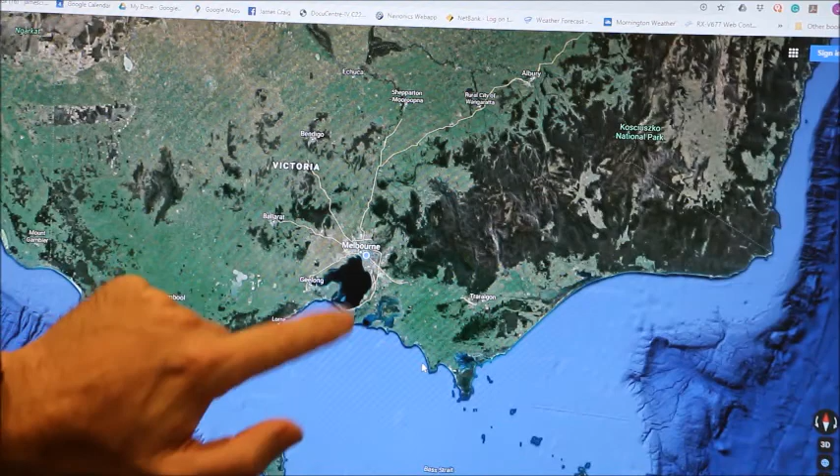What I want to do is I want to go back to the environment and something we as Victorians and we as Melburnians can do. And I want to take you through something that I think is important and it's very precious to me. And I'm just going to do this on my computer screen. It's a little bit old school, but here we go. Okay, clearly a map of Australia. And here we are down in Victoria, and particularly Melbourne. You can see this black dot here is the bay.

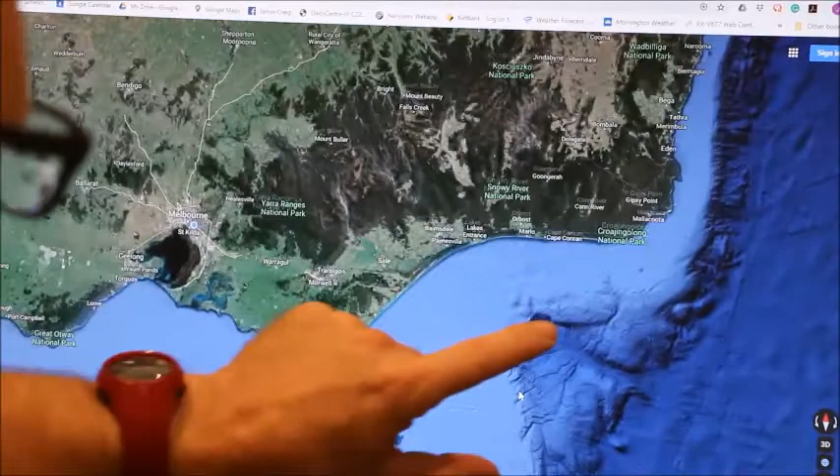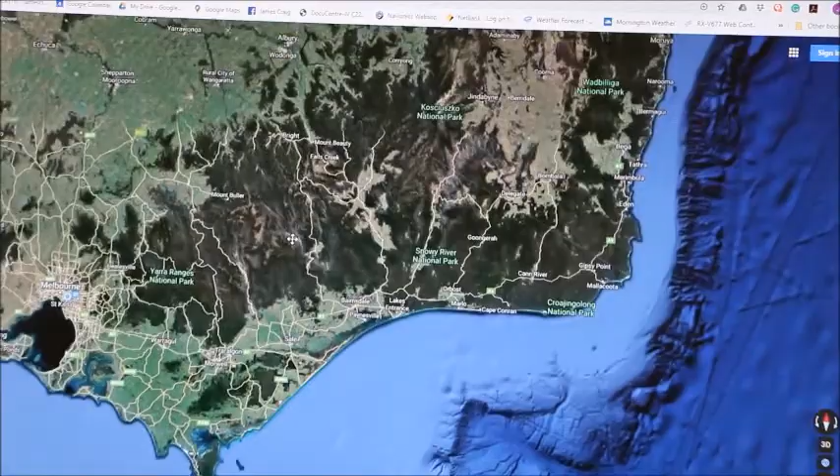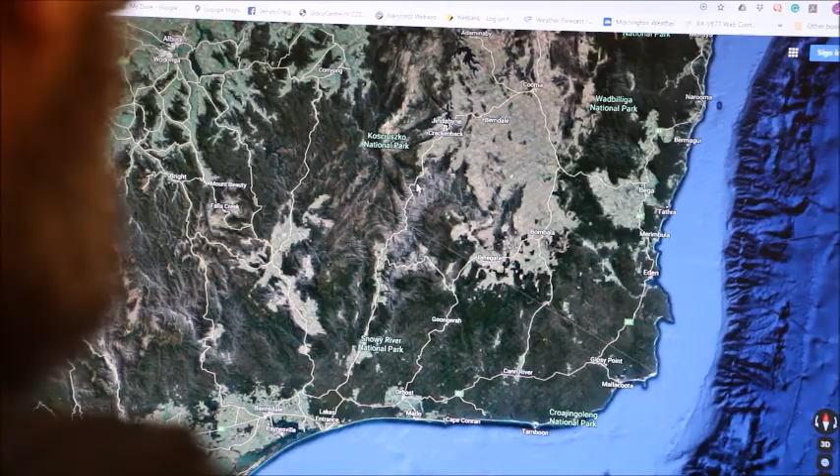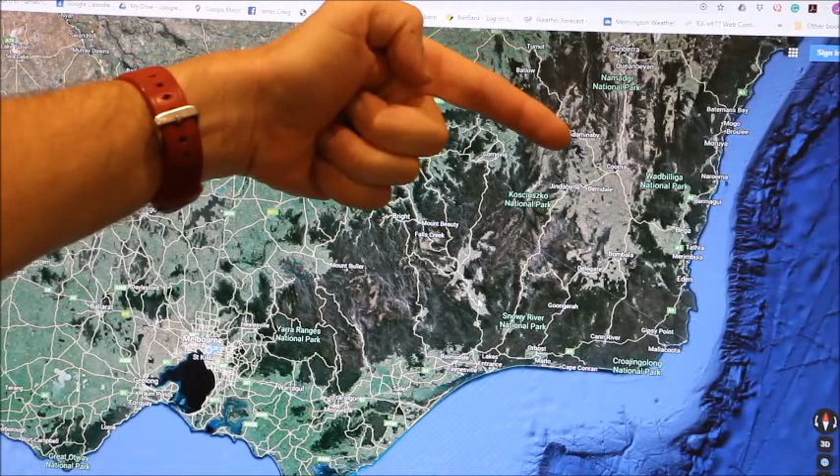We have up here a bit of a small power station coming off Eildon, and the governments are now looking at the Snowy Hydro scheme. And in proportion to Melbourne, here's Jindabyne and Eucumbene. This is the Eucumbene Dam up here in New South Wales. Canberra's somewhere in the middle here. There's Canberra up here. And the Snowy Hydro scheme is a very, very long way away from Melbourne. To get that electricity here, that's a big job. That's hard work.

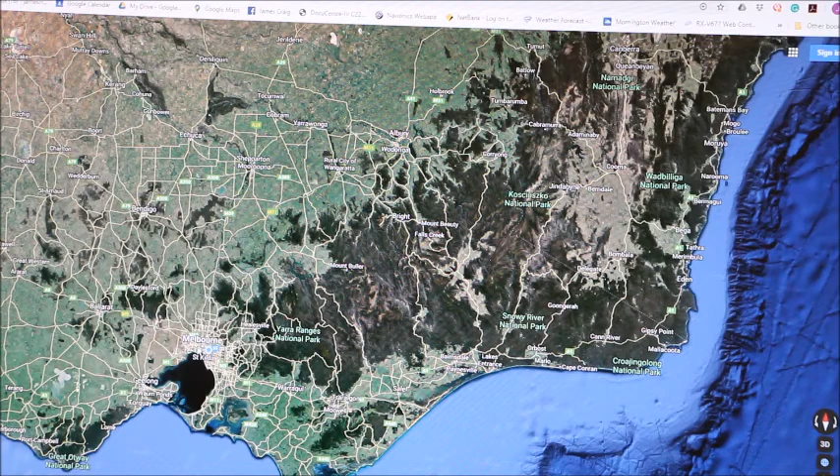We're burning our coal, which is quite conveniently nowhere where we get affected because of all the winds. The winds blow the smoke the other way, and as Melburnians, that's good for us. We can charge our electric cars up at the power point without having to worry about seeing any smog and pollution that you get from burning coal all the time. And these things run 24 hours a day, okay? We don't have any mechanism of stored power.

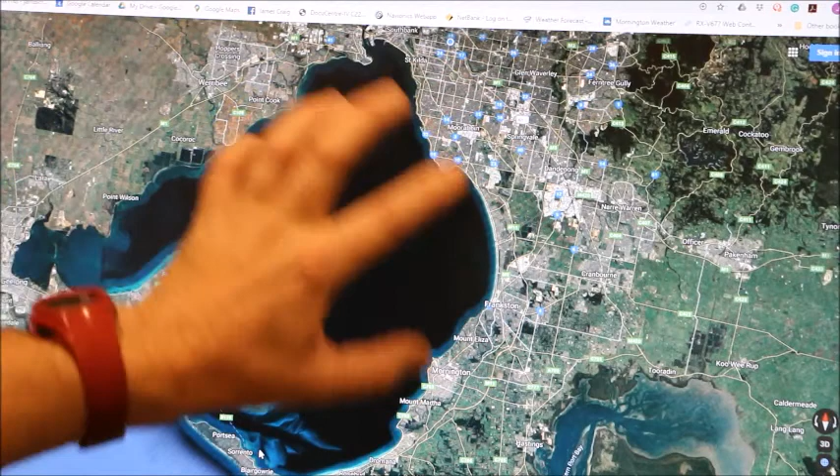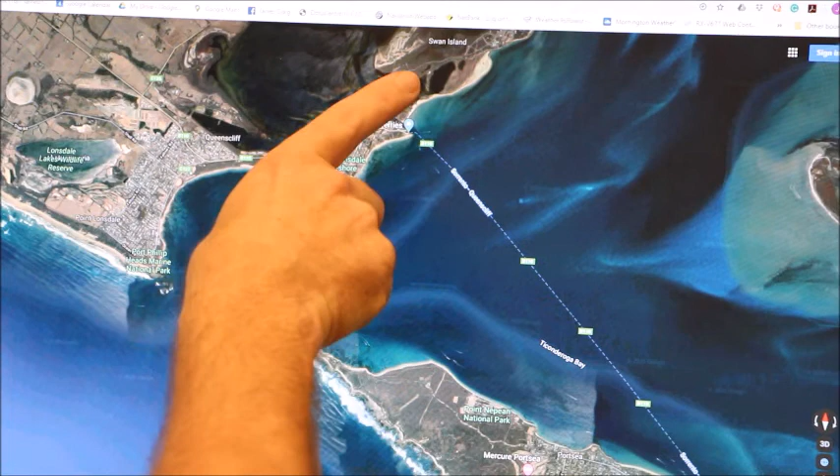Except this bay contains about 25 cubic kilometers of water. And it empties out at the heads here. Those of us who live around the bay are familiar with the heads. We've got the Mornington Peninsula on this side. Here's Portsea and Point Nepean. We have Queenscliff over here and Point Lonsdale on this side here. And you can almost see the flow of water that comes out through the heads here.

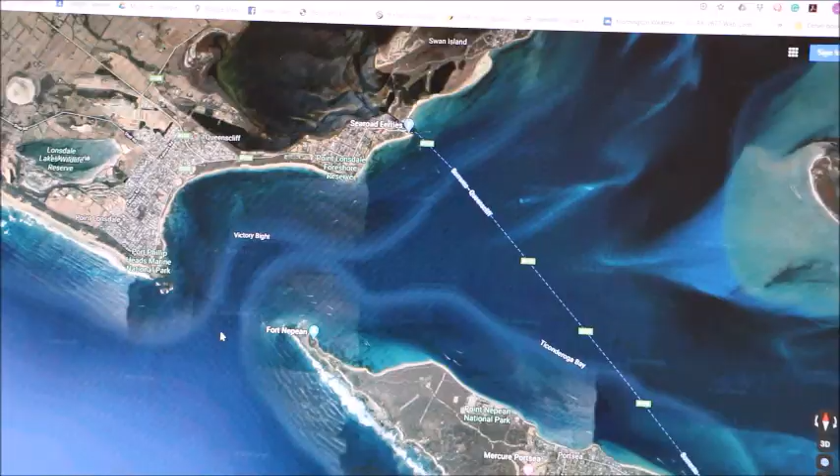And we have tides. We have tides every 6 hours. So the tide will come in and go out, come in and go out. It does it 4 times a day. And so we have this huge amount of water coming through the heads 4 times a day. And we have not captured, and I don't understand why the government and the energy minister is not capturing this amount of energy. It's free energy. It's an enormous amount of energy. And we've got to do it.

We've got to move away from coal. Absolute number one, we've got to stop burning coal. We've got to be at the front foot of leading the world with clean energy. Now, putting wind in, that's great. Putting solar in, that's great. But when it's not sunny here in Melbourne, not sunny here in Victoria, that's a problem because we're not getting any energy. When the wind is not blowing, we're not getting any energy. But 4 times a day, this tide is coming in and out.

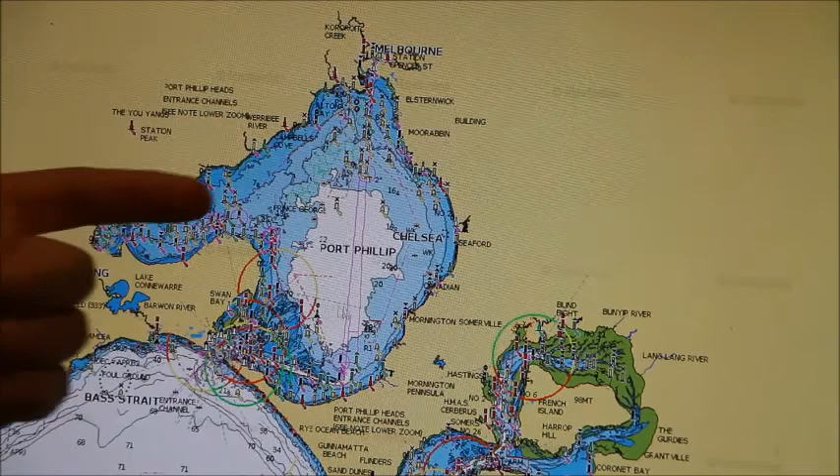Okay, and so I want to show you a model of something that I've been working on, a design that I've been working on. So here we are, here's Port Phillip Bay. It's about 20 meters in average depth in the middle here.

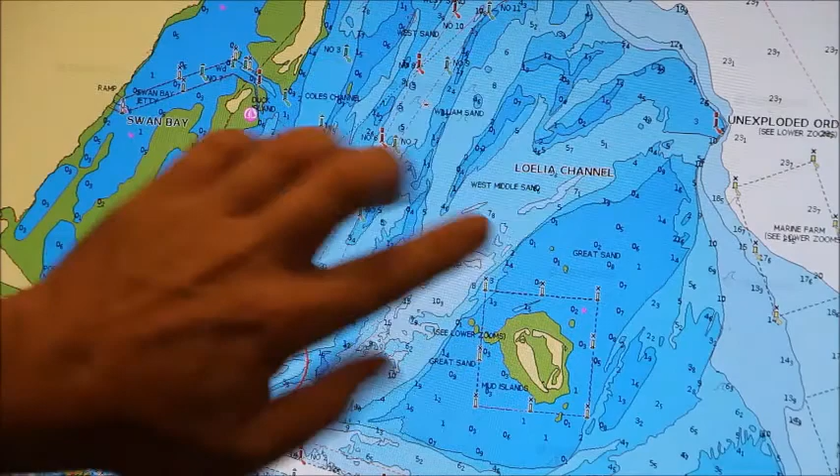And as we come down here, we have some really, really shallow areas where it's only about a half a metre, it's only a couple of metres through here. And then you can see this big white channel along here, that is where the ships come out of the bay. At the end of that shipping channel is a big deep trench running through here.

And on the Point Lonsdale side, it goes from about 60 metres of depth, and there's a sheer cliff that runs around this side of it like so. And it goes from about 60 metres of depth up to about 6 metres in depth in a very short space. So very big cliff face.

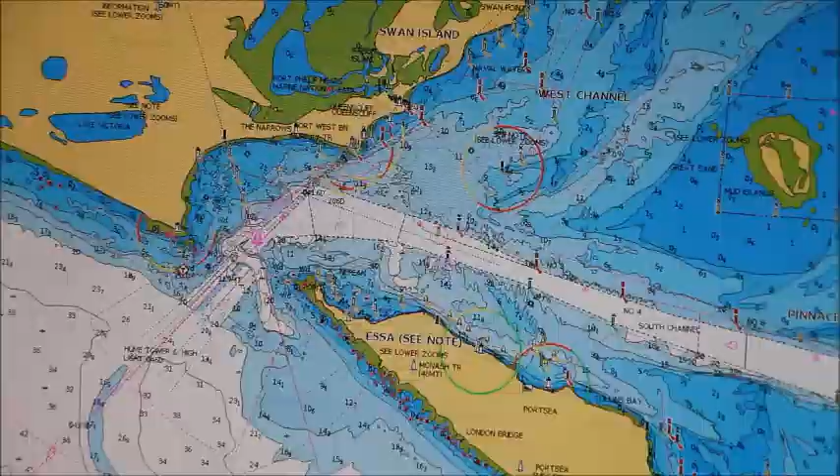Now this used to be a river. Once upon a time, before the bay was filled with water, this was about 5,000 years ago, this was all land. And this is the bottom of a river. And it came out and then exited the heads like so, and eventually joined up with the ocean. But 5,000 years ago, this was all land and we could actually walk to Tasmania. And as a result of it doing this, we're left with this big trench.

And those of us who know this area, it's a very dangerous piece of water because of the currents that come in and out, and of course our weather from Melbourne is predominantly southwesterlies. But I want to show you what I'm working on in terms of just occupying this tiny little bit of stretch here. It's about 1 kilometre long.

You can see here the shipping channels. This is where the ships go. This is the entrance. And I just want to show you what it is that I'm proposing in this space here, because I think this is really important. There's a couple of black lines through here, they're ships coming through the shipping channel, and you can also see another line in here which has a couple of markers on the end. That is 1 kilometre. Okay, so I'm just talking about 1 kilometre's worth of space.

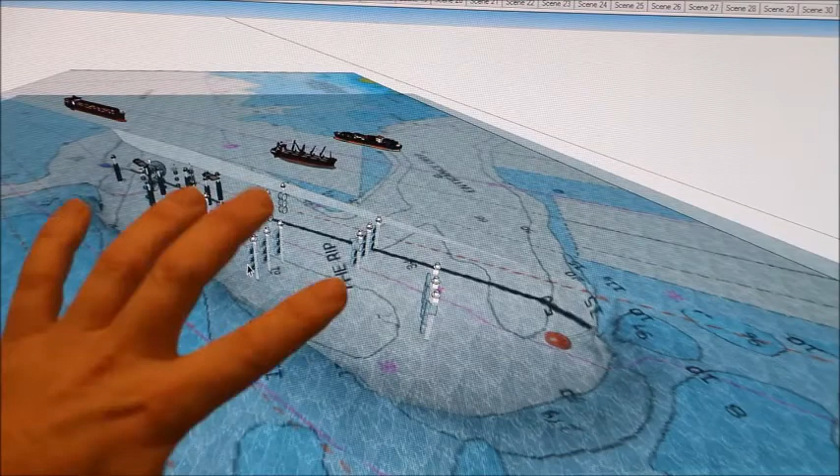As we fly in like this, you'll see what I'm talking about. The ships are sitting over here in their shipping lane, and the energy farm, the tidal farm, I want to put into this deep trench here. And the reason why I want to put it into the deep trench is because that's where you get the hardest and fastest flowing water.

If I take you back for a second to looking at how flow rates work in streams, you always get the maximum flow away from the sides and away from the bottom. There's too much friction along the bottom and along the sides. And so you'll always get the fastest flow in the middle of the deepest part, and when it goes around corners, the water will try and push out, because it's just the sheer weight of it, to the outer edge, like so. And this is well known. It's understanding flows through river and tidal stream effects. This is very well known. It's not new.

So here is my kilometre. We have inside of that kilometre this deep trench, tidal farm towers holding various turbines, just to give you an example of what it is that I'm trying to convey. Here is a working barge. You can get a bit of a sense of scale, and that's the barge that we're going to be using to do the maintenance on these structures.

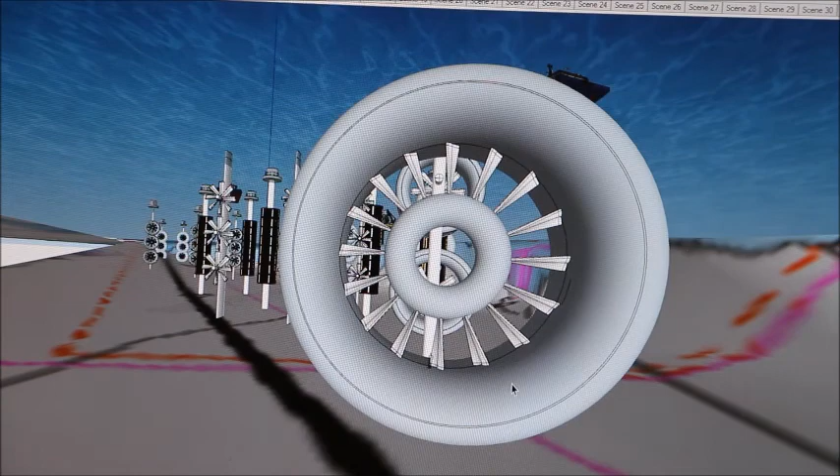So this represents a colossal ring generator. It is a massive piece. Now I'm not sure whether you can actually see it, but down the bottom here is a person standing just here.

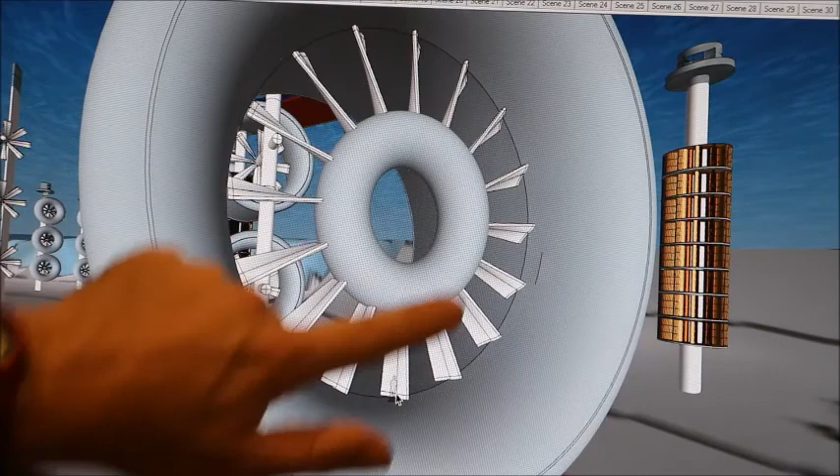That's how big this generator is in order to capture the flow. You can see the turbines around there. It has this donut on the inner ring, which I'll explain in a minute, and this massive cowling on the outside here. And the way it looks, if we look at it in half, and I just zoom in on where this guy is at the moment, we have what really just looks like an aeroplane wing.

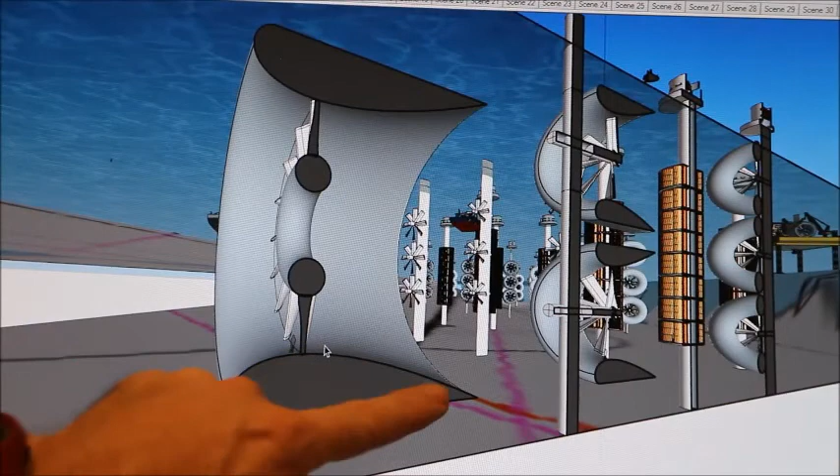And what we're trying to do is speed up water over this curve. So where the blade or the turbine is, we want to get the fastest speed through here. Now we don't necessarily need this laminar flow like a wing does, where we're trying to create lift. What we're trying to create is just speed. So we don't need all of this structure, but you get an idea of just how difficult this would be.

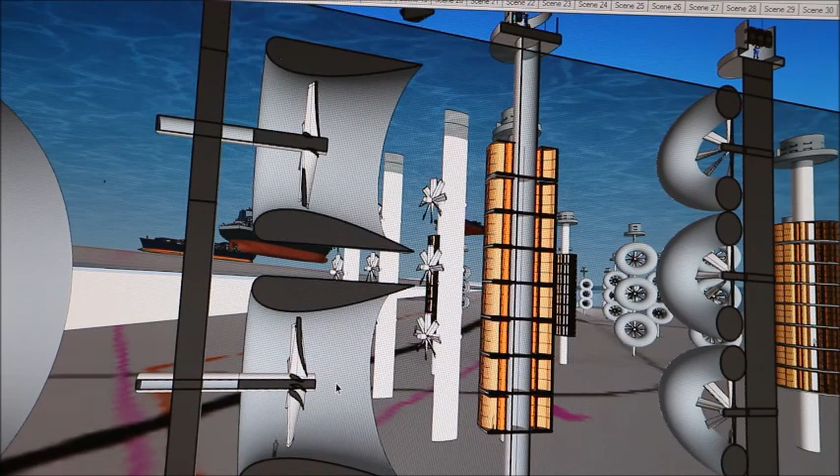This is 40 meters in height, 39 meters in height, this thing. It is enormous, and it's round and it's complex. So what I did is I split that into two similar sized turbines. The combined surface area is about 230 square meters. Same principle, same wing shape, same view of trying to accelerate water through. But these need to turn with all of the different kinds of currents and eddies that happen with water flow.

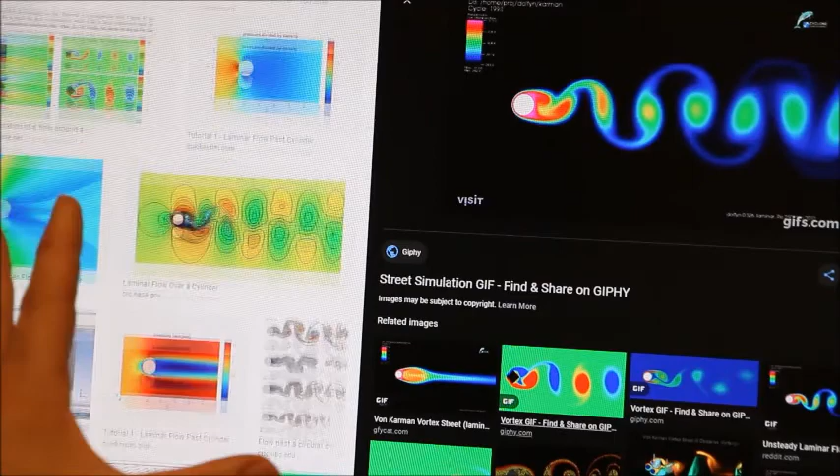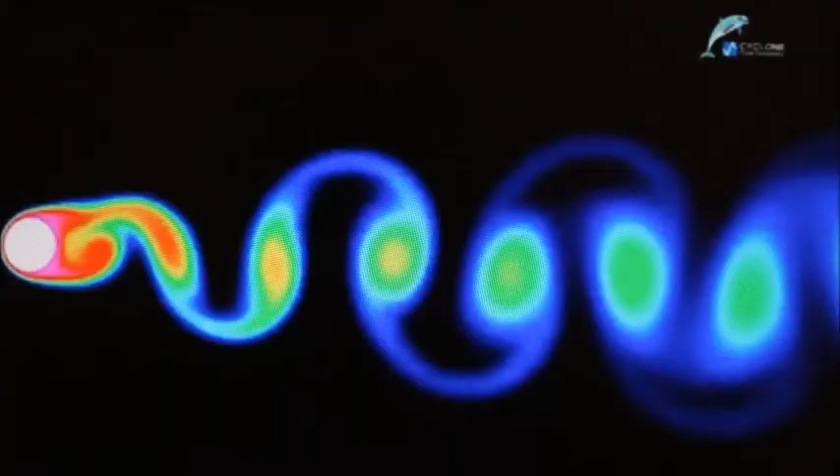And if I just show you, when we look at flows around cylinders, a lot of research has been done on this. All the information is out there. This is what's known as computational fluid dynamics, where we put an object in, we say that this is water at a certain speed, and we can see what happens to the water and the effects of it afterwards. Here's some flows. You get these eddies that come off the backside of a cylinder, and the cylinder is going to be our structure, and we know what happens with these eddies further down.

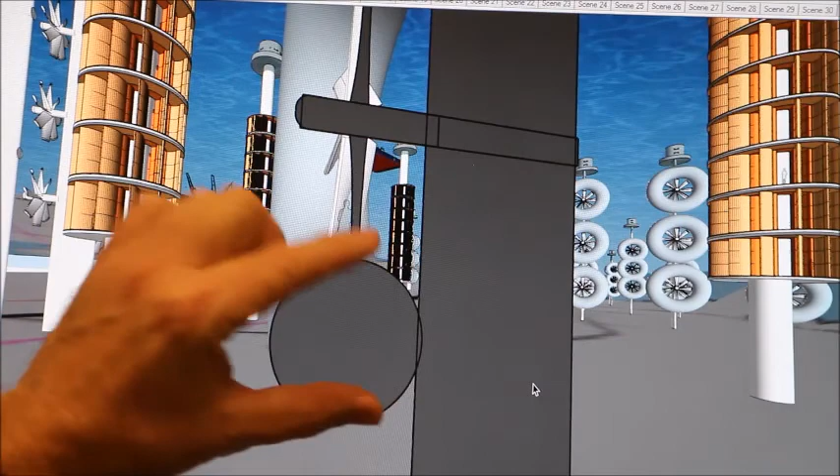There's nothing new about this formula. The mathematicians have been working this out for a very long time. These donuts around these blades are a technology where we try to create cylindrical flow around here, because we know that just after the top of the cylinder, that is where we get the maximum amount of water flowing. These are not necessary. These are a really complex design.

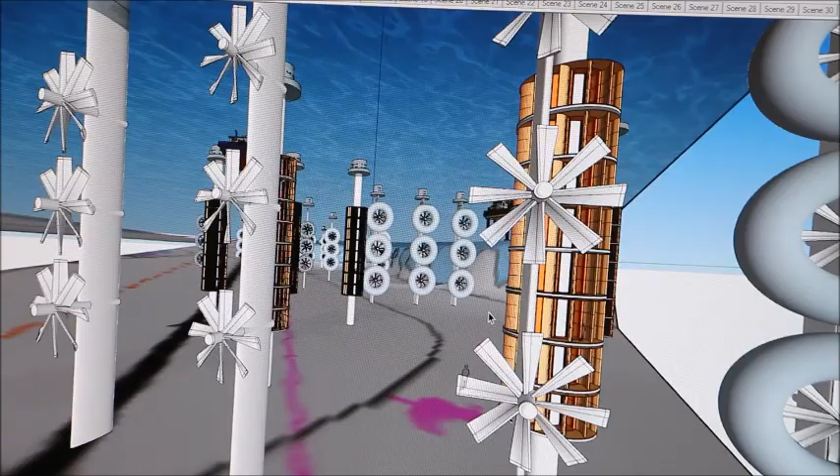So this is what's known as a horizontal axis water turbine. And it's no different to the wind turbines that you see on farms out in the countryside. These must point directly into the current at all times, so you really need a mechanism for this kind of blade to turn into the oncoming stream at all times. And as I just showed you with eddying around these objects, this becomes really, really challenging in water, particularly when water is moving around a deep channel like so. You can see some other turbines here.

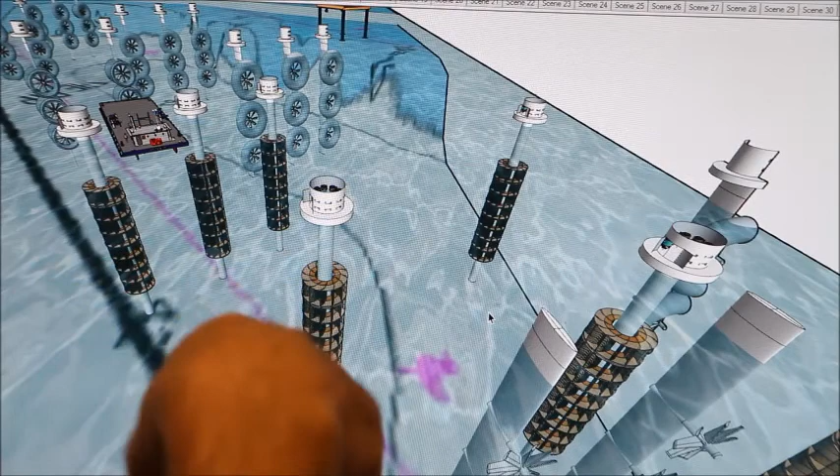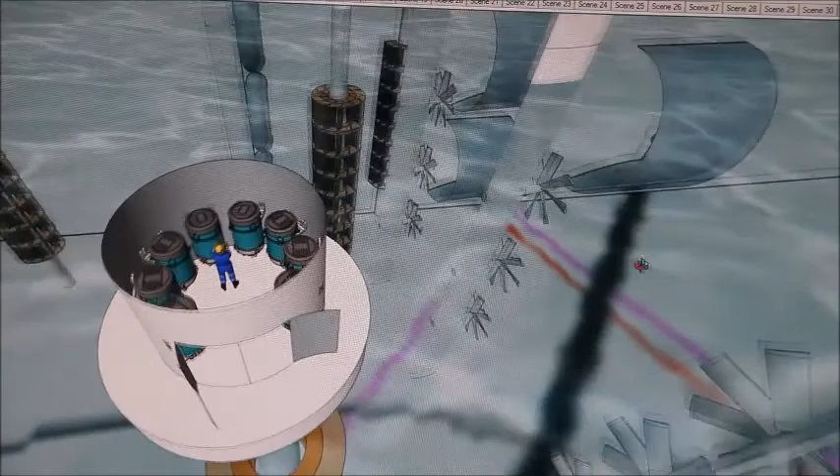Now these are my design, and I want to create what's known as a vertical axis water turbine. It's based on the principle of Savonius, but it's just slightly different. I like the idea of creating generators that are outside of the water. I do not like the concepts where people are putting the generators underwater. I think that's madness. From an access point of view, from a maintenance point of view, from the ability to swap them out, this is really easy, and I'll come back to that in a minute.

With this vertical axis water turbine, it doesn't matter which direction the water hits these things, they still have the ability to turn around. It doesn't matter where the currents are and what the day is doing, because it changes all the time. So let's have a look at one of these turbines as they're moving around. Now, water moves at different speeds depending on the height and proximity to surfaces, the wind and the waves and the floor and the time of day, and all sorts of things influence tide. And particularly when we're in a trench, there's eddying, there's all sorts of things going on down here.

We have a vertical axis set of blades, and they each are put into shafts that go up to the top. So each of these turbines is actually connected to its own generator sitting at the top. And this means that one can be ruled out. If we have a problem with one of the generators, then we can disable the actual turbine blades, or we can go and do the repair work or maintenance to the generator, and so on.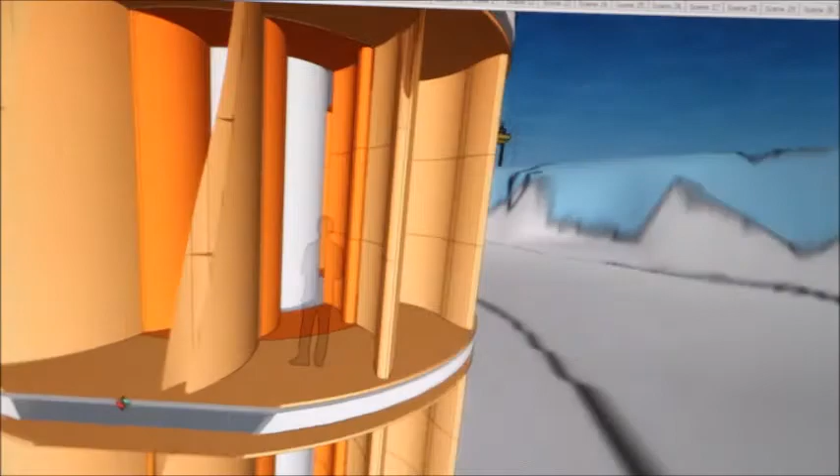These blades are actually made out of recycled plastic. We don't need a huge deal of strength in here. They are more like an aircraft blade than anything, and what you'll see, and I'll show you another example in a second, is that you have one zone where the water is always coming in.

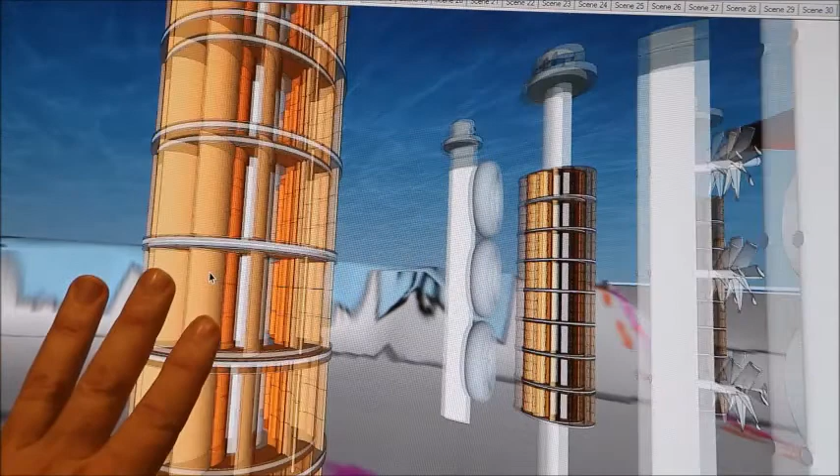It doesn't matter which way I stand on here, there will always be water coming in on one side and one side not. It's a design that's not particularly efficient. It's actually not as efficient as a blade where you've always got positive lift. This side actually produces a lot of drag, but because of the design, the power that I'm looking for is inside here. It's not actually related to the outside one. So I'm deflecting a lot of the drag away from the inside turbines.

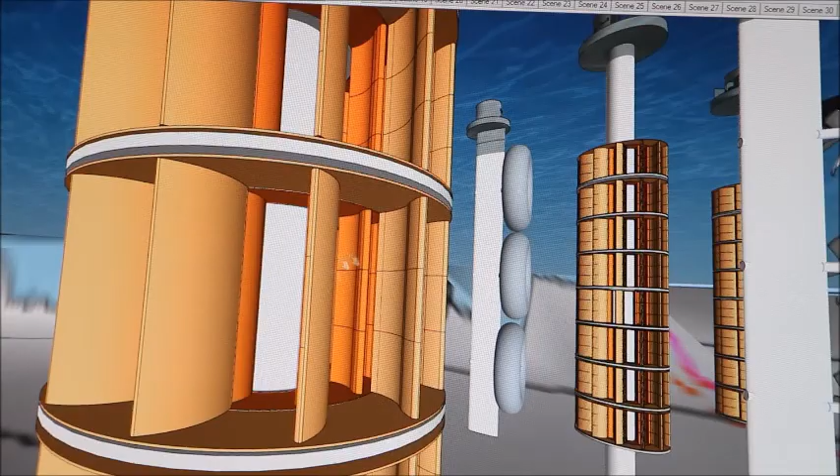These are connected to a shaft, which then goes up the inside and connects to the generators. So this valley becomes a bit of a farm, and so I've got some of the examples of my turbines, and then I've got some other examples in here. So here's the donut, the shroud that goes around a horizontal axis turbine. And I think it's really important. A lot of concepts have the generators underwater, which I personally think is a really bad idea. I like to see them above the water.

And as you can see, as we come up here, these are staggered. We've got them in a staggered position because we're trying to get full flow back again by the time it goes through one set of turbines and then through the next set of turbines, like so. But this is the stretch that I think is really, really important. It is outside of the shipping channel. It's 60 meters deep, which poses massive problems in itself. But it's a really, really powerful stretch of water to put these things in.

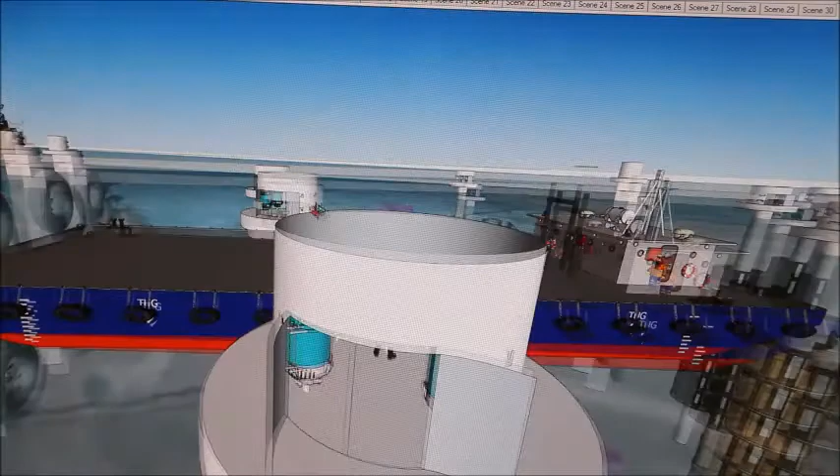So here's the working platform. It can come and access the generator zones. People can get in and out, and these can be safely lit up, they can be safely marked at night time for all boating, and during the daytime as well. And a platform can be made safe so that during the weather when it's suitable, people can get on and service the pieces of machinery, and they can be swapped out if need be, either craned out or wheeled out.

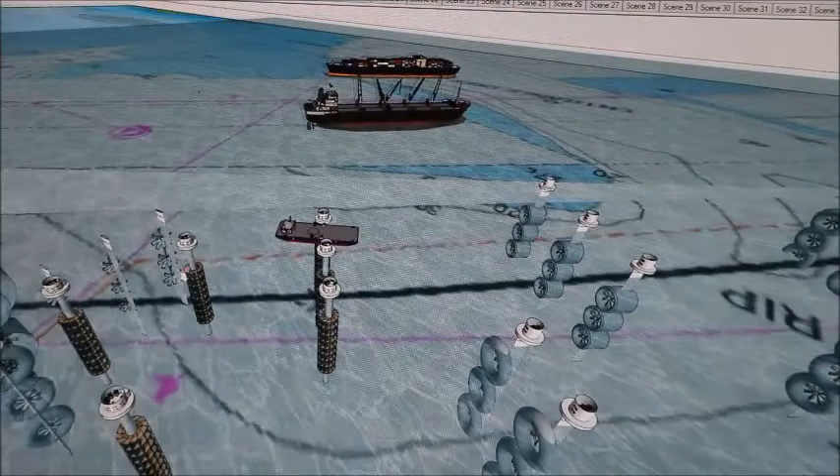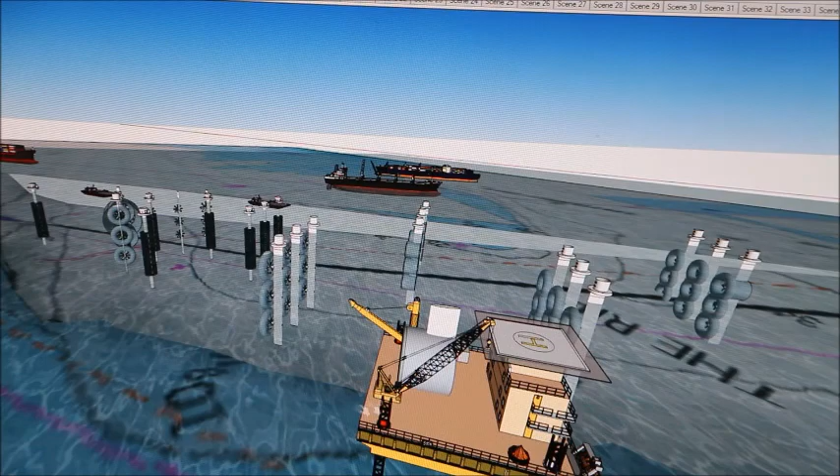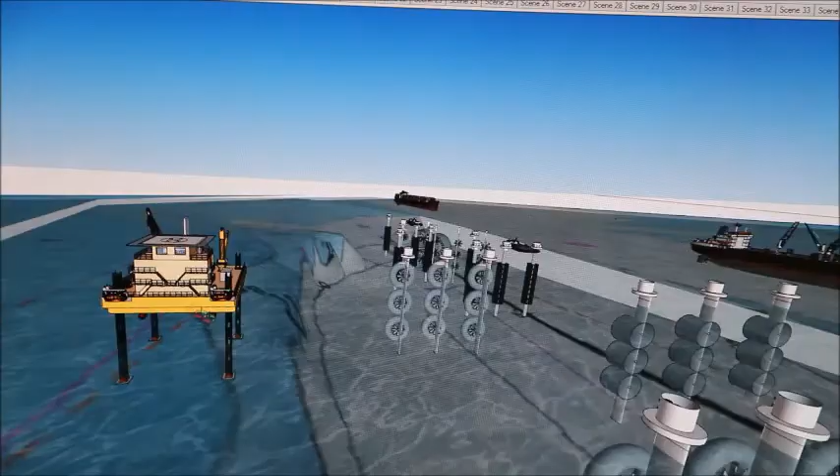And as far as the cabling goes, the electrical cables can actually run down the inside of the towers and then along the ground and up towards Queenscliff or back over towards the Mornington Peninsula side. I'll show you a really good spot for that at the moment. During the construction phase, we will need to put in a temporary structure that sits up on its legs and sits in that shallow bit of water. So it's only about 6 meters deep here, but there's obviously going to be a need to bring in, build and construct these things, and somewhere secure for boats to be able to tie up and whatnot.

So this is looking back at the tidal farm from the Point Lonsdale side, and if we just come down and stand on the pier here, that is about what you're going to see. You're just going to see the tops of where the generators are; they're there, you just can't see much. So let's have a look at the construction of one of these things. So it's generator tower on the top and the turbines down below. And this is about 60 meters deep. That needs to be obviously very strong, and the central tower is fixed. It doesn't rotate or do anything.

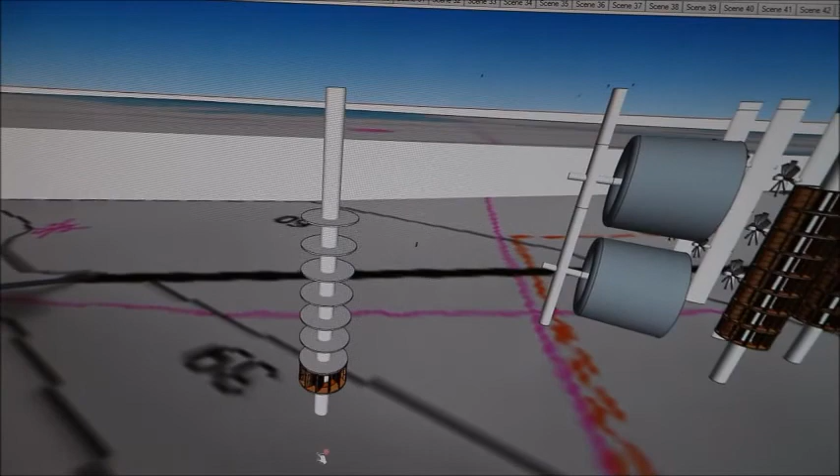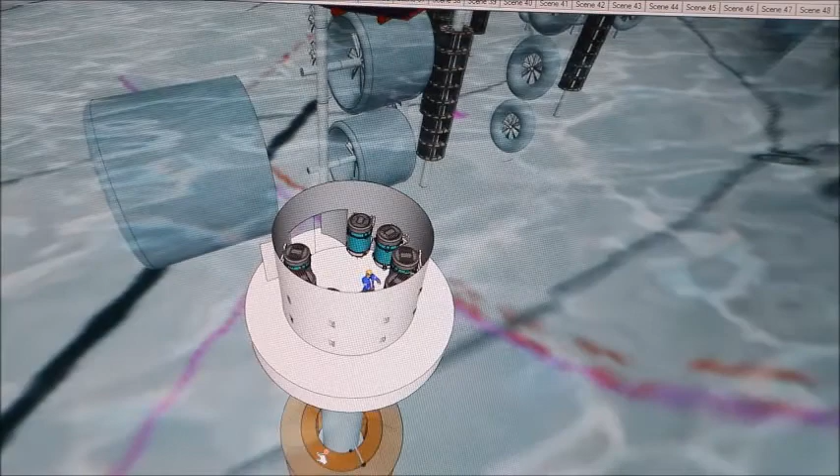And you can see that it's got these big rings around it. And inside these rings are the actual turbines, and they get built up like so. And then eventually the turbine construction is finished. These come in halves. These are really easy to put together. And then eventually on top comes the platform that houses all of the generators. And that is my proposal. This is what we should be doing as a state, looking at the energy potential that comes out of our Port Phillip Bay at the heads.

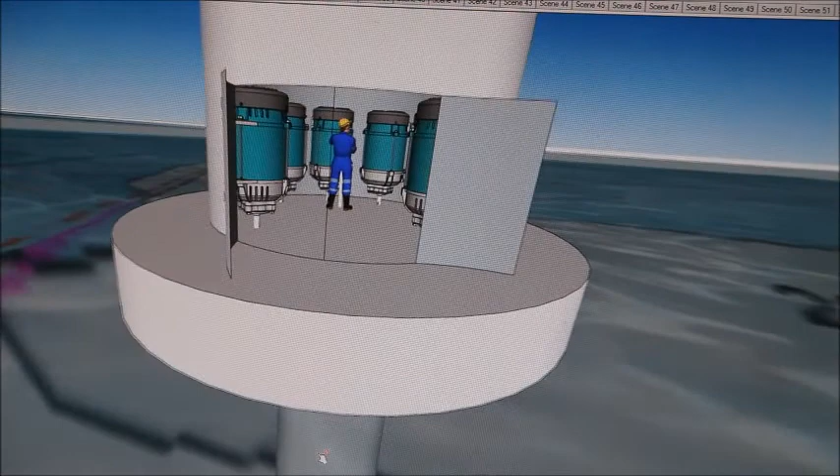And I want to put together a design and a package that I can take to the government and say, hey, this is what this is going to cost. This is what we should be doing. If you haven't got a plan right now to stop burning coal, here's a solution. And the solution is that this tide comes in 4 times a day. Now we are going to need stored energy. This power isn't running 24/7. It's only running a number of hours during the day. And so it needs to be put into some sort of storage bank back on land, and then from that storage, fed back into the grid.

And I'll show you a little spot which I think personally is a terrific spot. Of course there's going to be conjecture and there's going to be bureaucracy and there's going to be all sorts of things, but if people can get away from looking after themselves and thinking that this is going to spoil their view, well, think about where we are with climate change right now, and our contribution, burning all of that coal and that gas, is not helping.

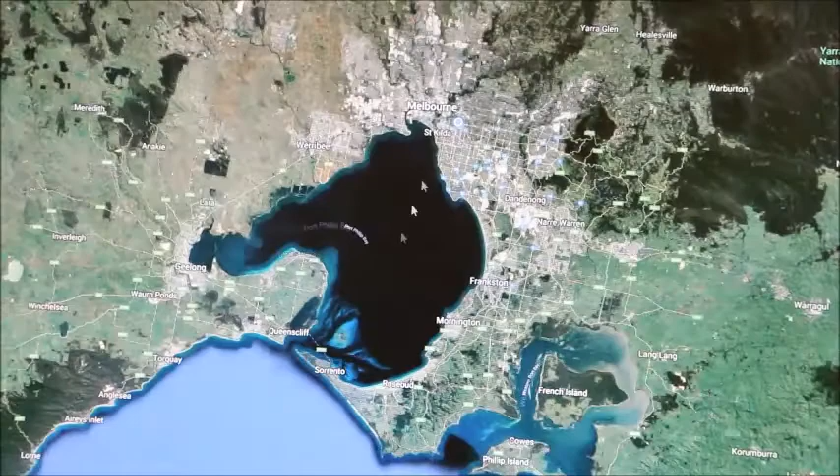And if everyone wants to move across to electric cars, well, that's not helping either, because all of that electricity just comes from burning more coal. So looking at Google Maps here, you can see the bay. It's an odd shaped thing. Geelong's over here, Indented Head in the middle. And we look at Portsea and Point Lonsdale here.

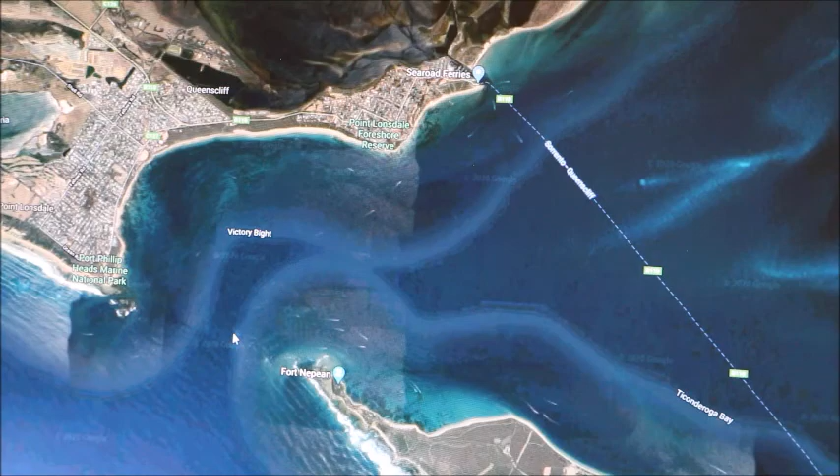There's a great opportunity for the manufacture and the construction of all of this thing to be done by locals living in this area. There's a great facility at Queenscliff for boats to be able to come in and out. That is a really difficult harbour to get in. You can see these speedboats here possibly going against the current there. Those boats are not going fast. The current that comes out of this thing is astronomical.

That's Swan Bay in here. It empties out here and it empties out further up here. So here's where we're talking of the kilometre of tidal farm going into just here at Victory Bight. You can see the shallows through here, and I want to use this piece of land that comes through here, Queenscliff Nature Reserve, and you can see a little block of land just there.

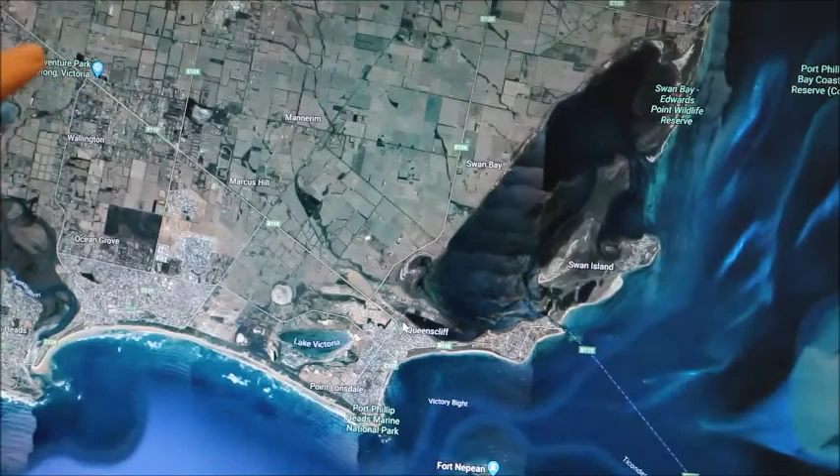And if I go and stand on the road here, you'll see up here there's infrastructure in place ready to connect to the grid. Coming back out of here, if we have a look up the road a bit, you'll see over here, this is the Bellarine Highway, and that Bellarine Highway carries all the power lines all the way to Geelong, straight through there. And there's loads of land and availability to put in a little substation somewhere.

I'm not suggesting that it gets done in Queenscliff, but perhaps further back in these rural spots here. Maybe someone would like to sell us a little piece of land for the ability to go and put a substation in. So I think that's very doable right there.

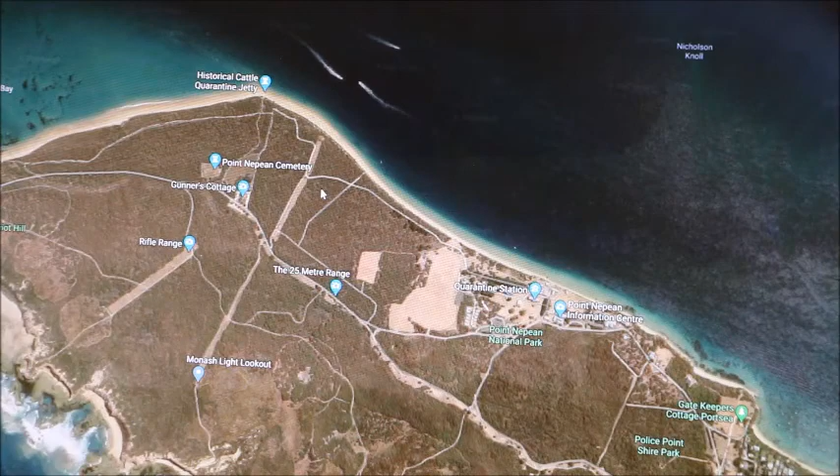On the other side of the bay we have Point Nepean National Park, a very sensitive area through here. More challenging to get a line in somewhere. But there are means of being able to get in here. Those kind of things can be worked out. There are roads. There's ability to go and put in underground cabling underneath these roads, or alongside the roads at the very least.

Through here or underneath the pathways. That's not the end of the world. That can be done. There's Pierce Barracks just here. Possibly a good location to bring a cable across and out, and then just follow the natural paths and out. So this is what I want your help with.

I want to be able to put together a cool kick-ass presentation to the government, a good bit of video, a good bit of fact, you know, let's tell them how many megawatts we can put into the grid using this tidal energy. Let's show them the technology that we want to put forward. Let's say, okay, here's our vertical turbine. The vertical turbine 4 times a day is going to produce X number of kilowatts.

And the system's going to cost this much, it's going to take X number of years to pay back, but by putting that energy out, this is how much carbon dioxide we are not burning from coal. So the coal power stations have got to go, and we need new resources. We need new sources of clean energy. We've got a massive big ocean out there.

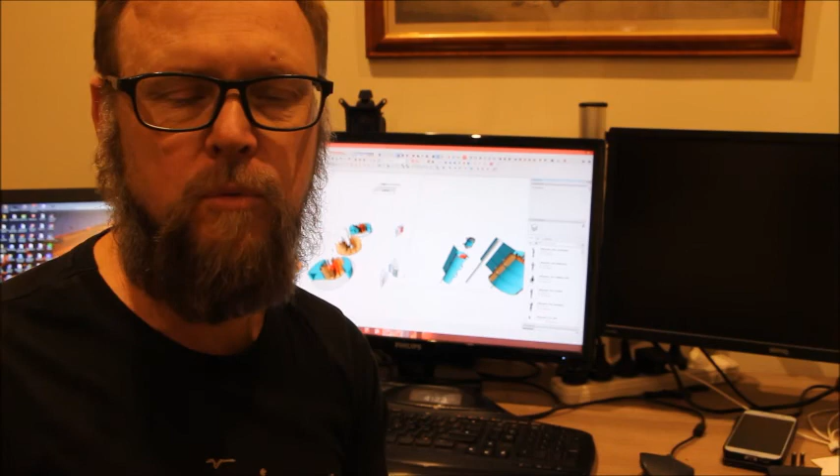Wave power is a little way away, but this mechanism inside the heads here, there is just so much potential to be able to capture that energy, and I want your help to be able to do it. As you know, I've been working on a number of conceptual designs for the ability to capture energy through water movement, and there's loads of them out there on the market, and all sorts of ideas and concepts.

But very few actually make it to reality. Just the working in water, the cost of them, and some of it's just the difficulty of actually being able to get them into place. And certainly down at the heads, it's 60 meters deep. It's some really rough water and a challenging spot to work on.

But if it can be done, if it can be achieved, then that's a good thing. That's a good thing because it means we can stop burning coal, or we can reduce the burning of coal. Let me show you a little bit about what it is that I'm working on.

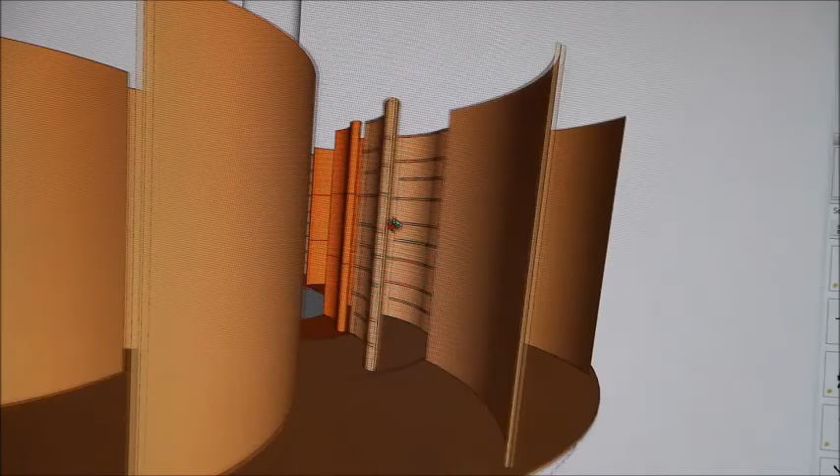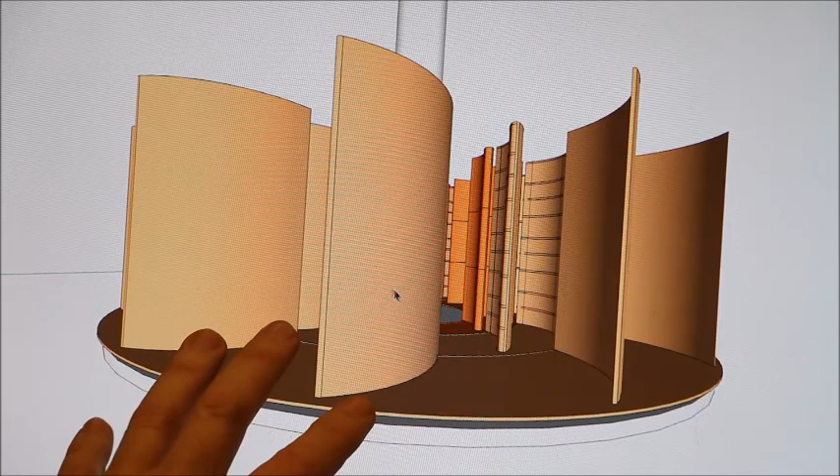The idea is that on one side you have all of your water entry, and on the other side it's blocked out, and it doesn't matter which way, any sort of subtle flow of water, the water will always come in onto one side. So this is the Savonius concept. And the problem with it is that if this is revolving, there's a huge amount of resistance and drag on this side and not enough to keep pushing it around on this side.

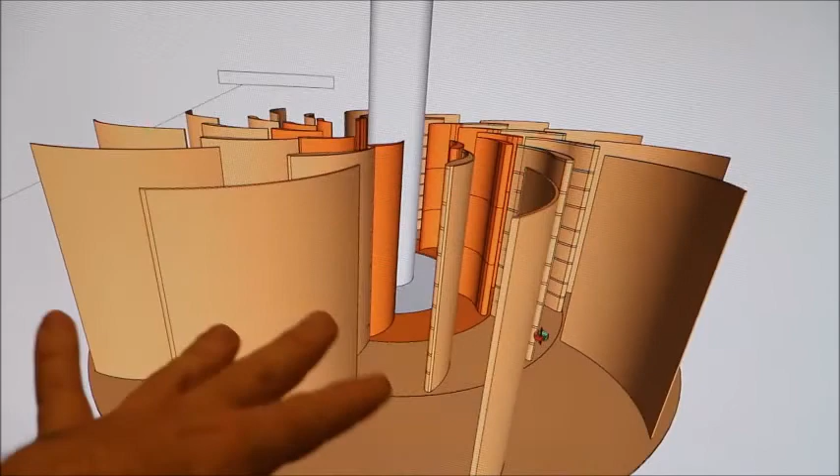So in this case here, the outer ring is actually just a diffuser. We're trying to funnel water into the turbines, and we're actually trying to block water in a way that helps with the actual exit. The water comes on here, you can see the aerofoil shapes here, and then it actually gets pushed out because of the curvature on the outside of the blade.

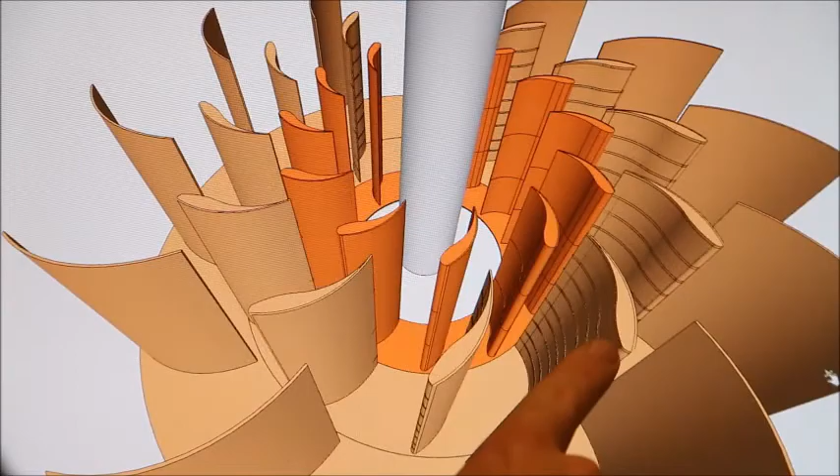So let's have a quick look at how this may work. The water gets funneled in here, it goes over these wing-like structures, it creates a lift, it starts to turn the outer ring. The outer ring builds up a little bit of speed and creates a bit of a vortex in here. There's still water moving through the center of this thing, goes over these wings at the front here, it pushes the back side of the wings on the back side here, so we're getting kind of a double

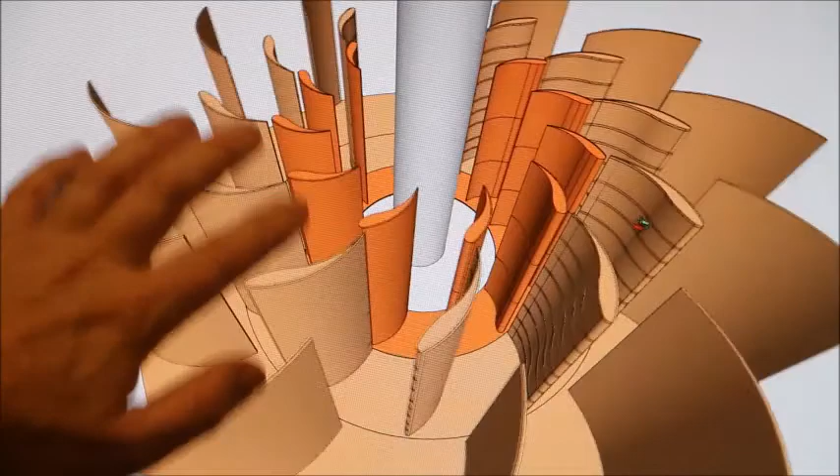effort there. And then on the far side where it exits, as the blades go around, they spin the water outwards. So we have water coming in, it moves through like so, and then gets spat out like that.

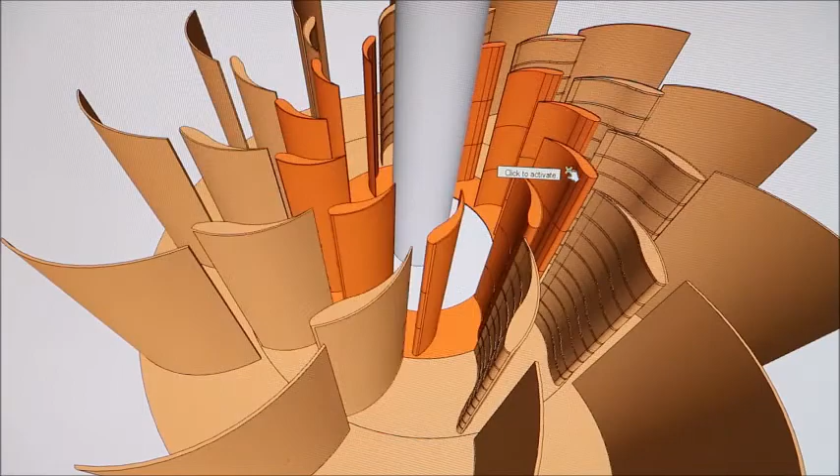Now, this is all just made out of recycled plastic. All it needs to be is something like a high density polyethylene. Now, high density polyethylene is actually lighter than water, so in terms of the structural weight of these things, they're actually buoyant. We do need to put some infrastructure in place, some bearings and things like that, but they sit on a bearing plate underneath here, and there's very little weight on them.

We have the means of adjusting as well. If we wanted to adjust our vanes, we can adjust them. This is a 2-ring system where this outer plate can actually swivel past each other like that, and by doing so it can actually change the angle of the inlets, and so we can achieve a better efficiency.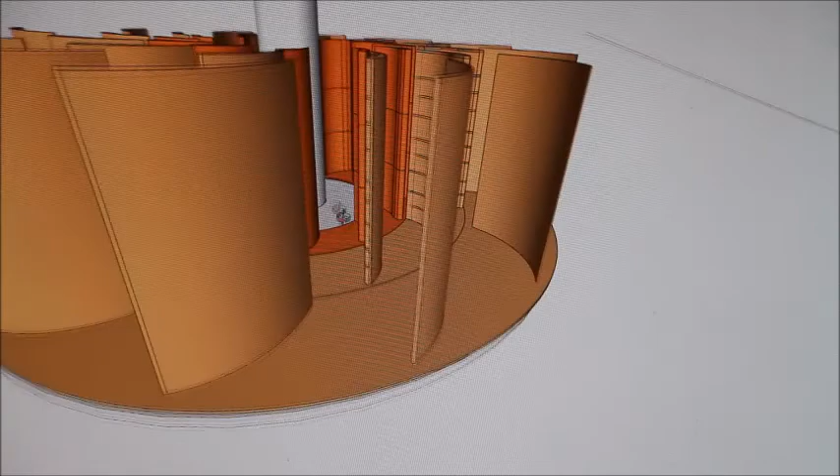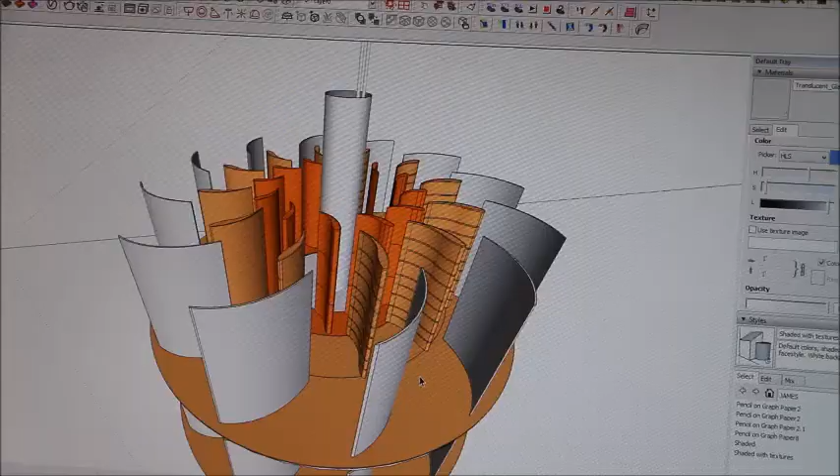It's most likely we can do the same technology with these guys as well, but it's most likely that they won't. They will just get fixed to a certain point and never really need to be moved again. And the CFD, once we work out our maximum efficiencies, will tell us what those angles are going to be. So as we've just had a look at, we've always got a side that is always open on one side and always blocked on the other side. It doesn't matter which way the water is coming in.

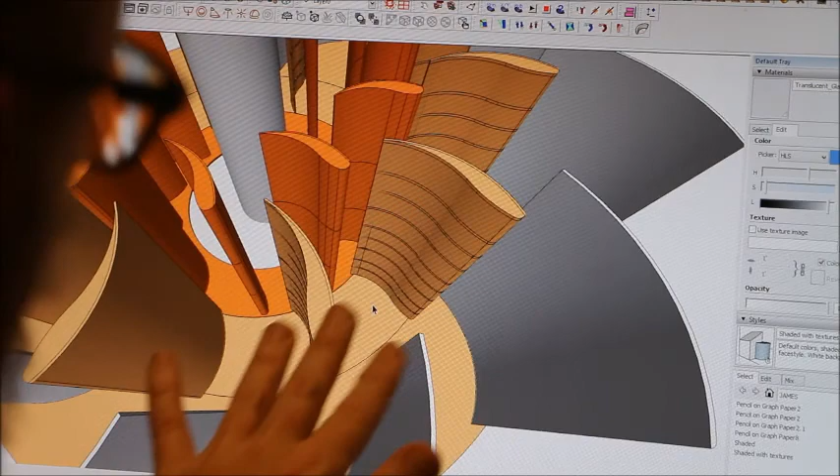As the water enters, it flows over these aerofoil shapes, creating a lift. At some point, depending on which way the water is going to come in, there's going to be a point where the aerofoil works, but then there's a point where the aerofoil doesn't work. And then it moves from just being lifted to then being pushed from beneath. So these outer blades that are drawing water in like so will end up with a pushing effect.

And then of course the water flows inwards and flows beyond these ones and flows onto the inner side. And what I'm expecting is that this is actually creating its own vortex effect in the middle, as well as the water that's flowing through the structure. And of course, it gets spat out the other side here. It all gets flicked outwards on this side here.

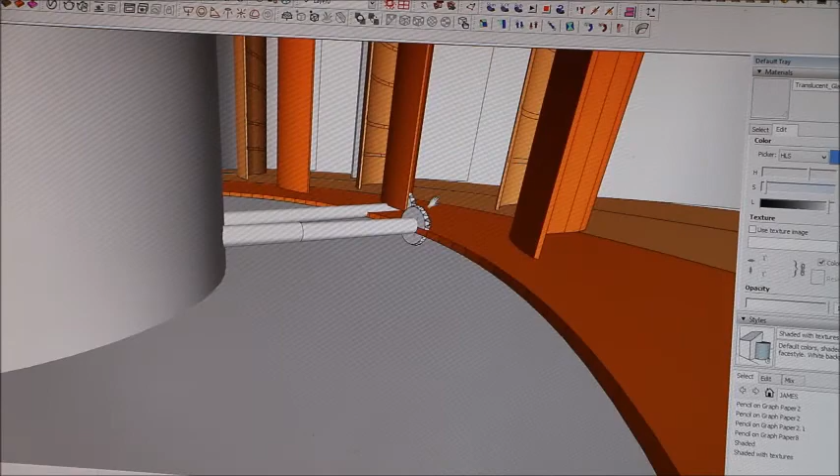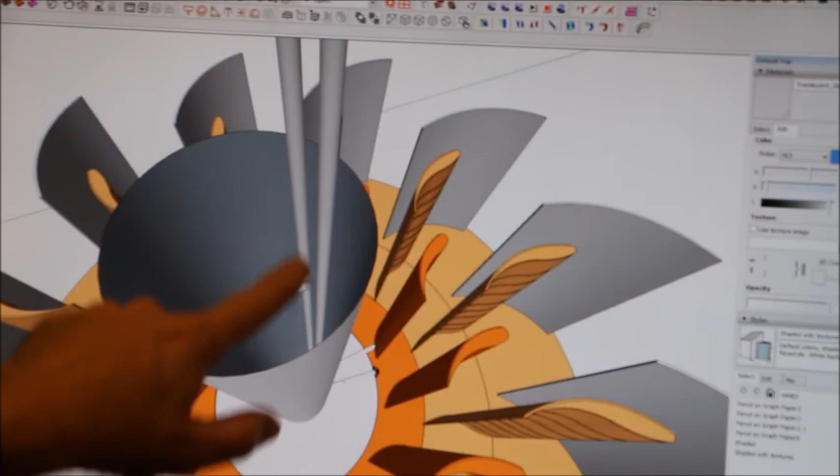What drives this thing is on the sides of these rings, which drive around on bearings, are these bevel gears. So these bevel gears connect to the inner bevel, and that's a drive shaft here. And that drive shaft goes inside the tower like so, also onto another bevel gear, and then all the energy and turning motion is taken up to the generators.

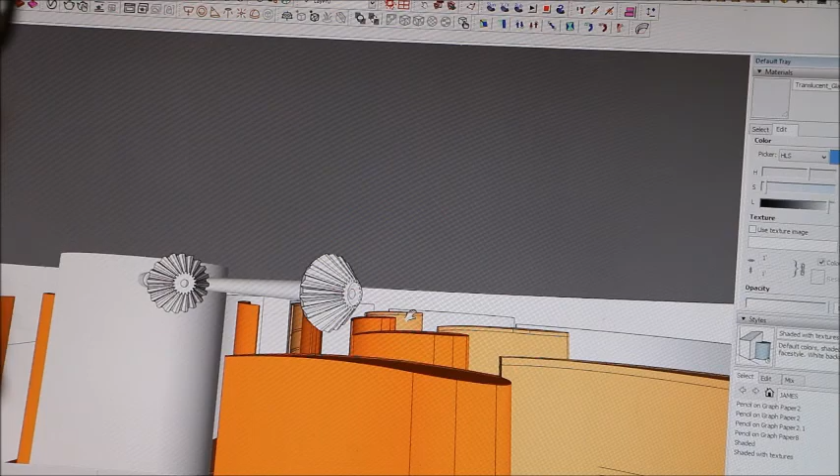And there's 8 of these turbines in place, and so there's going to be 8 shafts and 8 generators sitting at the top. They obviously don't sit at the top like this, they actually sit underneath. And they are connected to the top plate. I just haven't drawn this one in just for clarity, and I haven't drawn the top plate on this one just for clarity as well.

So there you go, there's an introduction to a concept which is really looking at a tailor-made solution for the 60-metre channel that sits at the Port Phillip heads. It's 1 kilometre long. And we can fill it up with a number of these vertical axis towers. Other spots that this could be applicable for would be Western Port Bay as well.

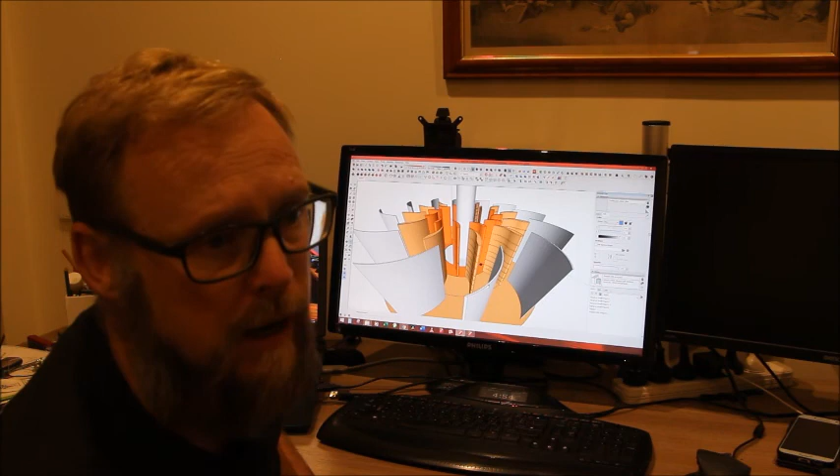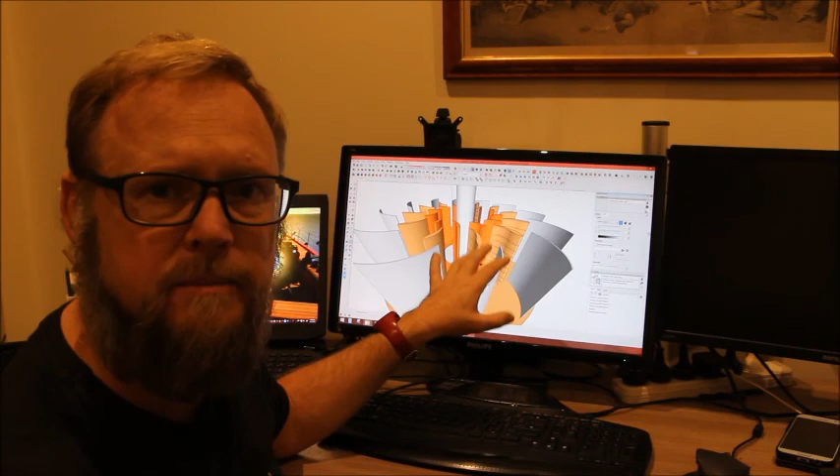And there's a shipping channel also in Western Port that just hooks around French Island, and also on the other side of Phillip Island there's some really good tidal flows that this kind of technology can be put into. Where it differs, I suppose, well, obviously there's the whole level of engineering technicality that's required, that's a given. But the actual structural elements, I think, can be made out of a lightweight recyclable plastic, which is the angle that I want to take, because I think that's important.

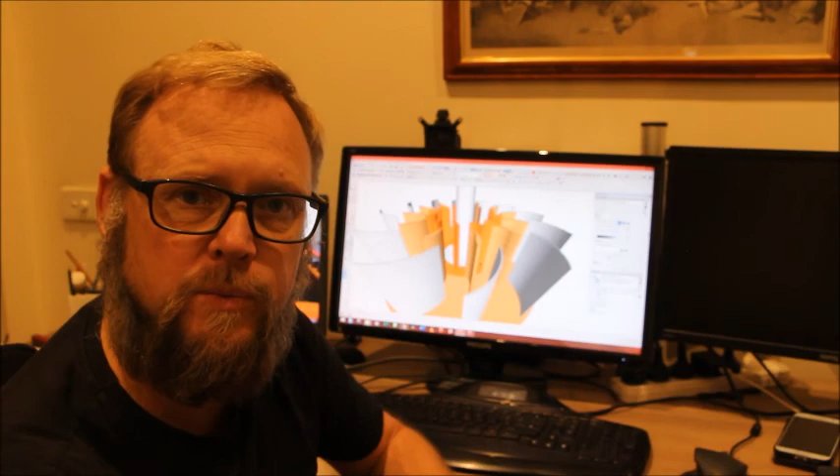I think there's an opportunity to go to Victorians and say, hey, listen, why don't we come up with a scheme where everyone collects their milk bottles. The milk bottles are made out of high density polyethylene. We'll collect everyone's milk bottles, we'll mash them up, create new high density polyethylene boards, and then we shape the boards to what you're seeing in here.

And it's pretty simple. The shaping of polyethylene is very simple, very hard to glue it, but we have an internal structure. We can screw the shapes together, we can mould up nose pieces and leading edges and those kind of things. And it floats if it gets damaged. Well, then it floats out to sea. But to make it all out of steel, that's very hard, very heavy.

There's corrosion, no corrosion in plastics, and it's a good opportunity to start recycling and get everyone in Victoria on board. Why not? This is something for our future and our kids' future and generations beyond. So this is probably a really easy thing to achieve. It's not that hard to collect milk bottles and come up with a collection system. That's where I'm at.

So I really need help with putting all this together in a presentation. So maybe videos. I need a professional presenter, someone who can speak without muttering and mumbling all the time. I need someone who's definitely better looking than me. I need someone who can convey the message. I need script writers who have knowledge and experience of actually presenting to the government for grants.

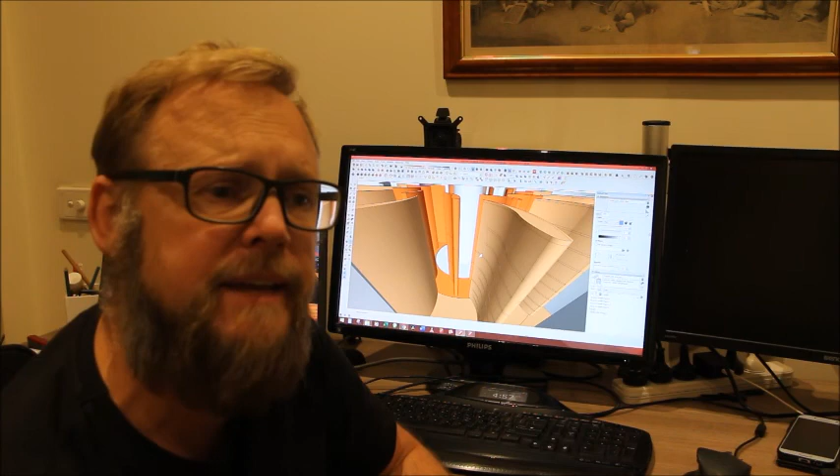I need engineers who can come up with data. I need people in computational fluid dynamics who can run these things. Engineers who can work in 3D CAD. There's a whole bunch of people I need before I can actually make a presentation to the government, and then they say, okay, we'll give you some money. We like it. How much is it going to cost? You go through the bureaucracy.

And the thing is I'd hate to lose out to the big energy companies who can charge an absolute fortune for this kind of stuff. You know what? I'd really like to see it be done fairly, where the money goes into Victorians and locals, and it's manufactured locally and designed and produced locally, and it becomes our thing as opposed to outsourcing it overseas. And it just takes a bit of leadership and direction and know-how that we can gain from experts.

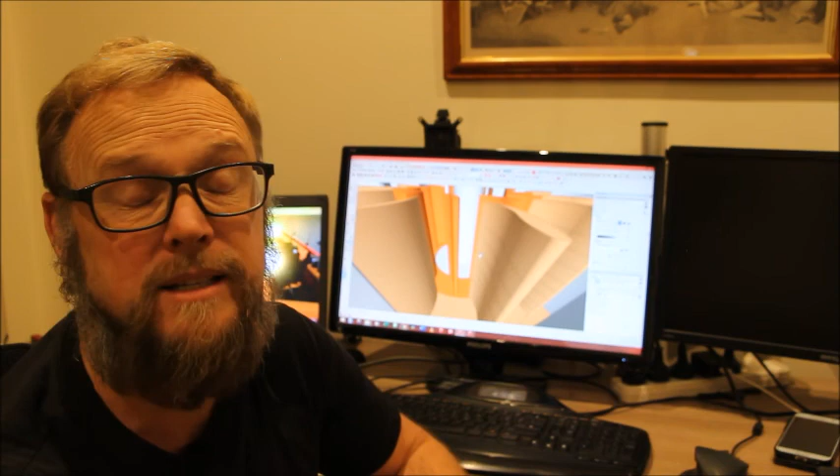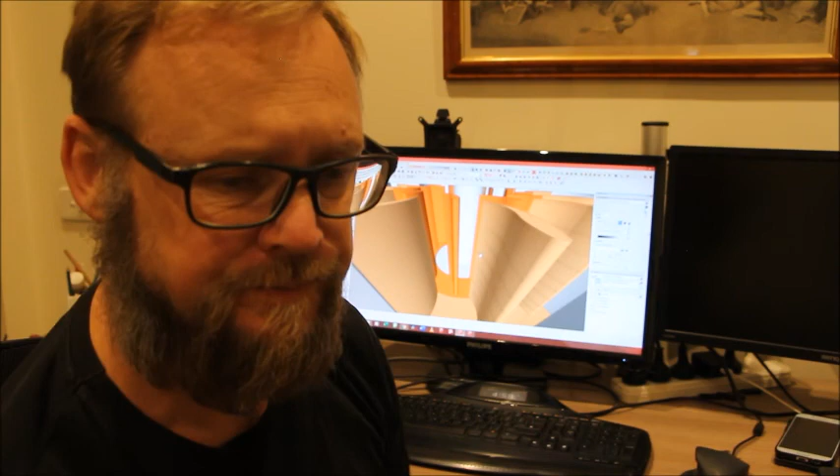But it would be really nice if we could just achieve this in Victoria at home here. I would hate to just outsource something like this to China or somewhere where it's just all about cheap labour. I really hate that idea. I hate the idea of people working for really little money for some energy giant's gain and their shareholders' gain. It just goes against my grain. So maybe help me with getting over that. I don't know.